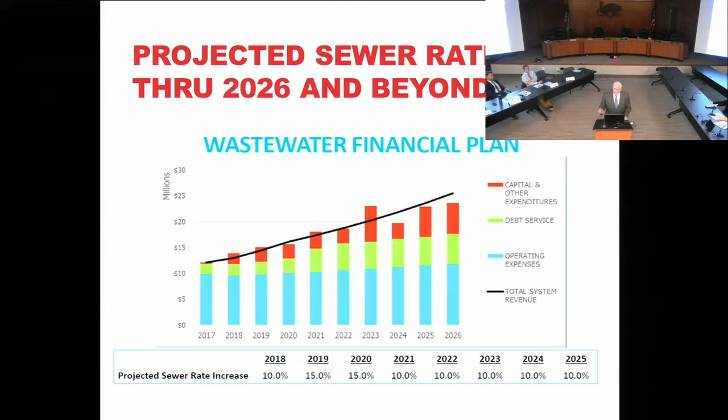I know when I owned a double on Cook, I did not pass on the water. It was baked into the rent. So one of the things that's important for you to know is that rate cost is going to increase in the near future. Our rates, however, are generally competitive.

We're still in the bottom, really 40%, in the region. Rocky River is at $69 based on a typical 6 CCF per month. Lakewood's at 81. The Northeast Ohio Regional Sewer District, which is 37 different communities, is at $89. North Royalton, 95. Parma, 99. They're all facing the same pressures. So while we're raising our rates, we have an eye to regional competitiveness.

I just want to show you a glimpse of a couple of issues here. Underneath the street in front of your rental property is a set of pipes that generally look like this. Sometimes there's only one pipe, but if there are two, it's an over-under sewage strategy.

Generally, because in 1910, when they had to dig these trenches, you know the hard shale that we are bedded on, digging those trenches was very hard. So they dug one trench and put the sanitary pipe at the bottom and the storm pipe on top, and created some overflow invert plates so they could take shifting volumes of rain without flooding basements. So likely, this is the root of the problem.

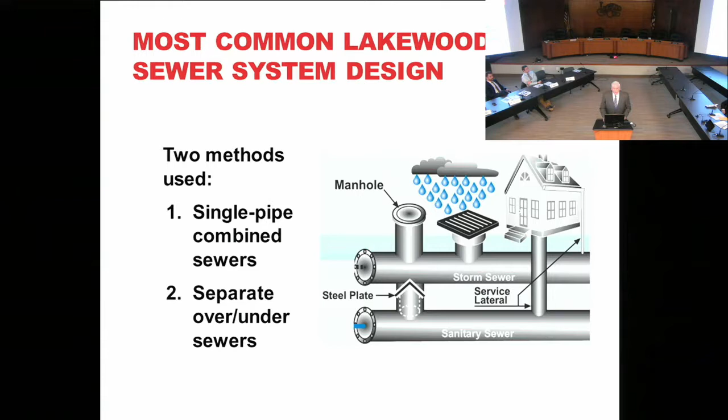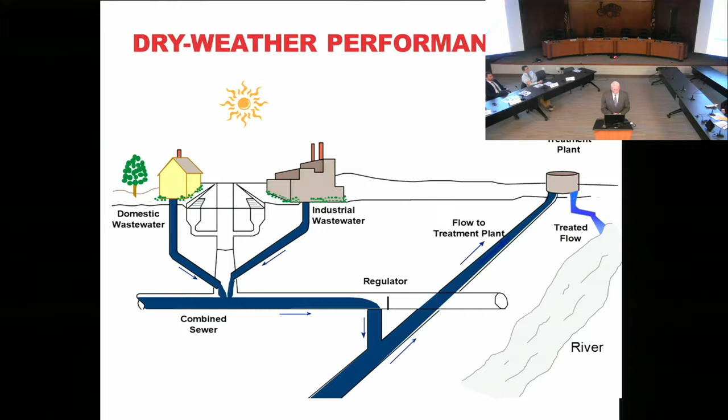The challenge is when we get a big rainstorm. We produce more volume than we can handle. The system starts to fill up, and it's designed to overflow into the lake untreated at that point. If it didn't do that, given the structure, every basement in Lakewood would ultimately be a holding tank.

So the conventional goal in 1910, '20, and '30 was to address waterborne pathogens and public health concerns, cholera, diphtheria, and typhoid.

The goal was to get this dirty water away from the population as fast as they could, and the best way to do that in a city like Lakewood, given that we're on a high plateau with a major watershed we could send it to. In that watershed, Lake Erie, it would become diluted and ineffective. Well, obviously, 100 years later, that dilution wasn't capable enough. We degraded the quality of water, and we needed to make changes. We've been making them ever since.

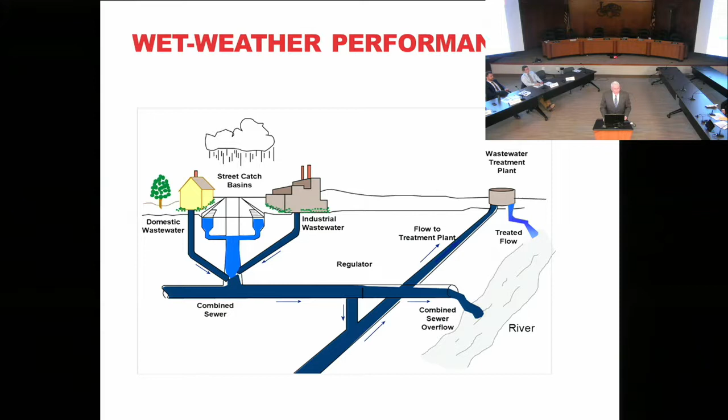So I have a video that's going to show you what happens in a rainstorm in Lakewood. Let me maximize that.

Many older cities across North America use combined sewer systems, where both sewage and stormwater flow into a single pipe to wastewater treatment plants. But during heavy rainfall events, this mixture of raw sewage, stormwater, and garbage backs up the sewer system, creating a combined sewer overflow, or CSO, allowing untreated polluted sewage and garbage to flow directly into local waterways.

All right, so that's what happens in a nutshell. Let me close this off.

Most of us don't spend a lot of time thinking about the infrastructure beneath our feet. When we wash the dishes, empty the bathtub, or flush our toilets, a lot happens underground, out of sight and out of mind. So what does happen underground? Well, Winnipeg has a... there we go. All right, I think we're back.

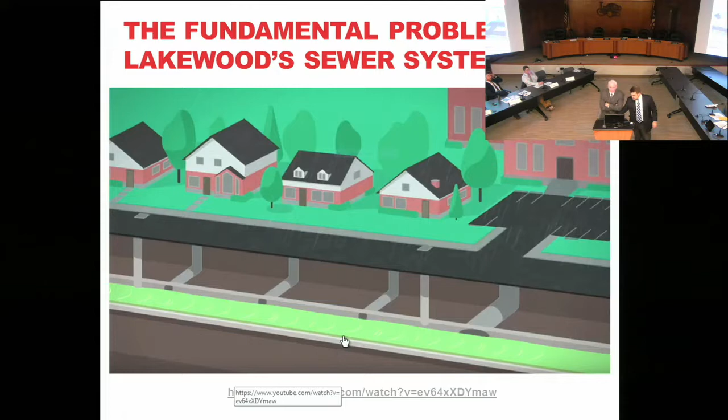So you get the idea that in dry weather, we have 10 times the capacity to deal with our everyday volume. In a wet weather event, a big one, we don't. For example, this past October, we received 0.8 inches of rain in 20 minutes. Perhaps you remember that storm. It was an enormous volume that came at us very suddenly, and our system behaves as designed to direct that untreated water over dams built into our sewer system to overflow into the lake. That's illegal by the Clean Water Act of 1972, and we are earnestly working in a variety of ways to re-engineer the system so that we reduce those overflows and ultimately eliminate them.

One key element that's important to you is how water moves off your house as a private property owner. This applies to rental property owners and non-rental property owners alike. The roof is the collector system. You'll see in this picture an example of a house on Atkins, where the blue are the gutter pipes, and there's a lateral that runs out to the street.

Down below, you'll see green, which is the sanitary pipe. In Lakewood, generally, the sanitary pipe is at the foundation level below, and oftentimes the stormwater pipe is several feet above that, and that's a pretty classic example.

How we manage water that moves off your property becomes a challenge. Now, this is a busy picture, but it shows the variety of things that go wrong. Things get clogged, pipes actually infiltrate from one to the other. In 1918, when my house was built, the lateral pipes were clay pipes, and they basically just butted against each other.

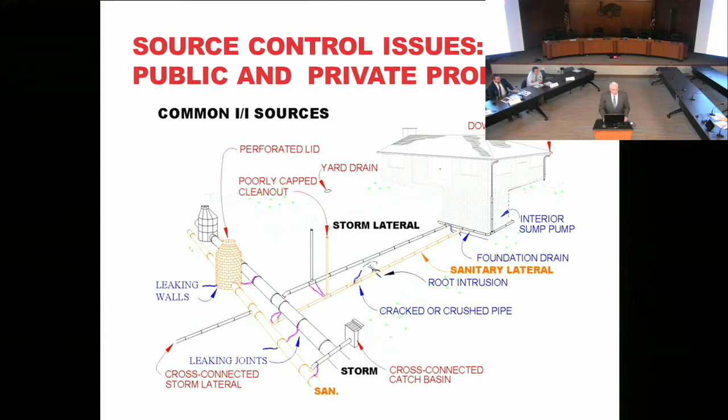When they create the backup, you get this infiltration of storm to sanitary, sanitary to storm. Sometimes the contractor who built your house or mine, when they got to the street in an unregulated housing market, didn't care which pipe they hooked into. They hooked to the first pipe they came to, and the sanitary pipe might have gone into the storm pipe illegally, or vice versa. Either way, we create significant pressure on the volumes. So there's a lot to think about here. I want you to be aware how serious it is, and I want you to take responsibility for understanding how water moves off your property.

Now, in the last 10 years we've spent about $18 million on water distribution improvements — those are water mains. Our water mains are also of the same vintage. You'll see this, particularly in cold weather like we have these days: the ground shifts, the pipes are brittle, and you'll create a fissure in a water main under high pressure, causing leaks in the street that require us to patch and ultimately replace.

We've been pretty systematically replacing water mains. It's probably the most disruptive project we can put on your street. We have to dig it up twice — first to put in the new pipe and test it, then dig it up again to hook all the laterals from the houses to it. It's a very, very challenging process. If it happens to be your street's turn, once in a century, bear with us on that, but it's important.

We've also spent about $30 million over the last 10 years on our sewer pipes. But here's what's ahead of us: we estimate we have about $57 million worth of work to upgrade all our water mains over the next several decades, and ultimately probably $321 million of sewer work ahead of us. That's if we're really diligent about it — we're working hard to reduce these numbers. But the fact is, in a second-century view of the world, with our obligations to protect our watershed, and with a sewer system designed to behave in a different, acceptable environment, we have a lot of work ahead of us.

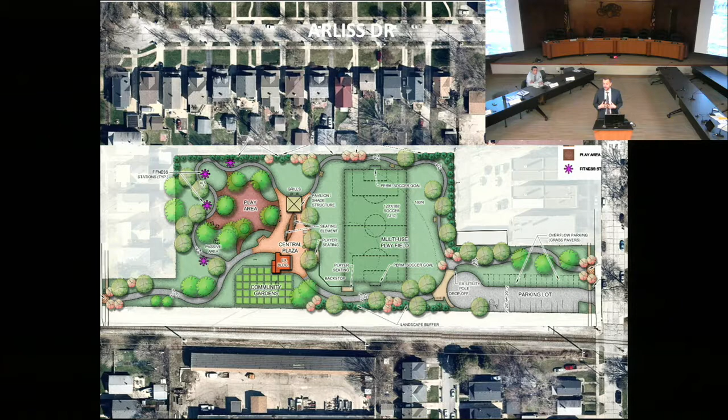What we've heard from our community members is that our park space is near and dear to our neighborhoods, and that investments into our parks—just like the improvements at Lakewood Park and the Solstice Steps, at Kauffman Park downtown, and at Madison Park—are showing a ton of value to our citizens. Improvements like this are important because we know they show value to our community.

The second park project we have our eyes on is Wagar Park. At the same time we did our master plan for Cove Park, we also did one for Wagar. Wagar is a marquee park on the west end of Madison Avenue, and similarly has not really seen a focused improvement plan ever in this community.

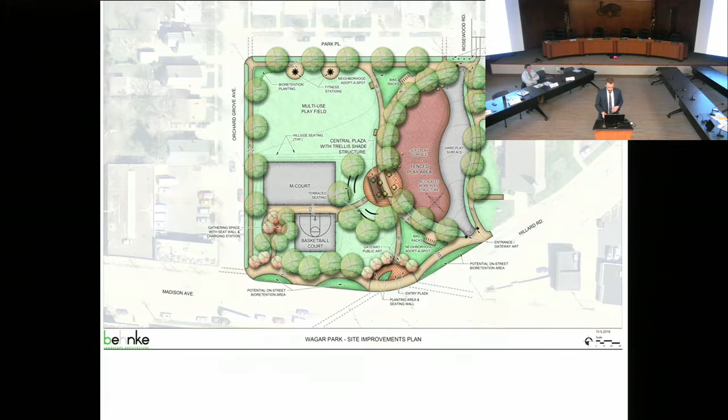We spent about a year coming up with this master plan. You'll see improvements including a new basketball court, a multi-use court, and a newer area for a multi-use field. This one also has a brand new playground concept incorporated into it.

This project is a little bit further out than the Cove Park project. We're looking at 2019 as a potential start date, but we wanted to show the community that we were serious about our renovation here. So last summer, we did a public art project where we painted a custom mural on the street for neighbors to enjoy, and it's been a wild success for us up at Wagar Park.

Next, I wanted to get into some commercial development projects happening throughout the community. The first is a project you're probably all familiar with: the Cleveland Clinic Family Health Center at the corner of Belle and Detroit, currently under construction and on schedule.

This $32 million investment will be open on July 25th of this year. They've been under construction for about a year, and it'll be certainly a welcome addition to our commercial corridor. Here's a photo from last fall—if you've been by the site, they've put the entire skin on the building, and they're actually putting up drywall right now, so they're progressing very nicely on site.

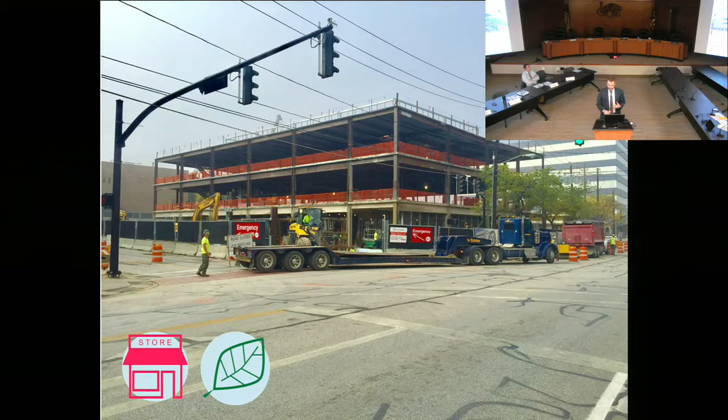We spent about a year with this property owner to re-envision this building's future. If you drive by, the outside is certainly going through a major exterior renovation, but more importantly is what's happening on the inside. This was a property predominantly built as office space that became non-competitive in the marketplace. The interior space just wasn't competing, so we worked with the property owner to re-envision its future. The exterior renovation is really a representation of how you do adaptive reuse.

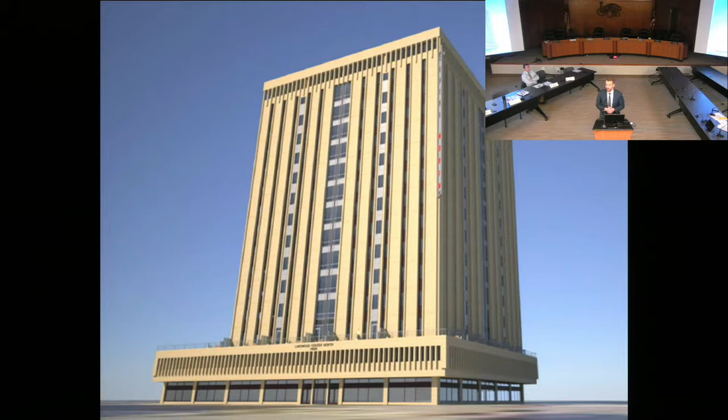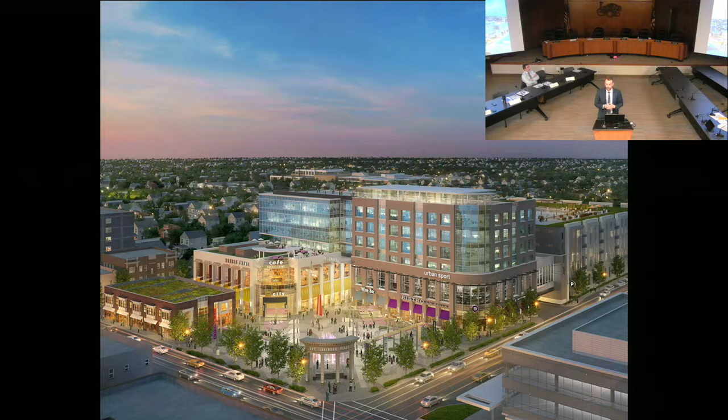Next is a project on the same block. So we had the Family Health Center, and I talked to you a little bit about Lakewood Center North. Then on the south side of Detroit at Belle is the former Lakewood Hospital site, where the city spent about a year interviewing developers to land on the best and most qualified developer to take on this site, which is Carnegie Management and Development Corporation.

They envision a mixed-use project on this site that includes new office, new retail, new residential, and two components that we're really excited about. At the corner of Belle and Detroit will be a public plaza for the community to access. This also envisions the historic renovation of the Curtis Block, the 1920s building at the corner of Marlowe and Detroit, which will get a complete renovation as well.

This project is currently going through the term sheet process with the developer, and construction would likely start on this project at some point in 2019.

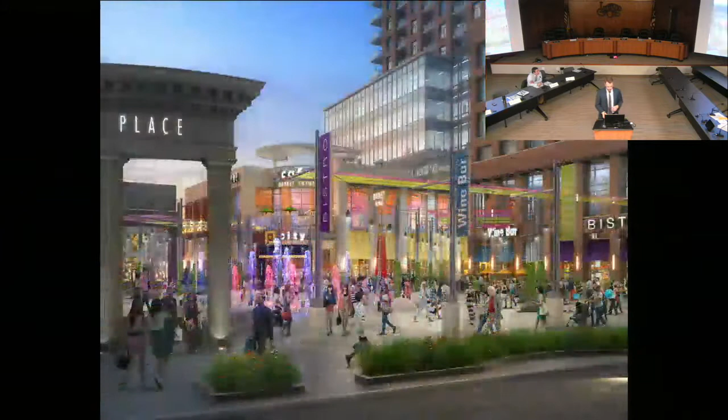Here's a closer look at what is envisioned for that public space at the corner of Belle and Detroit.

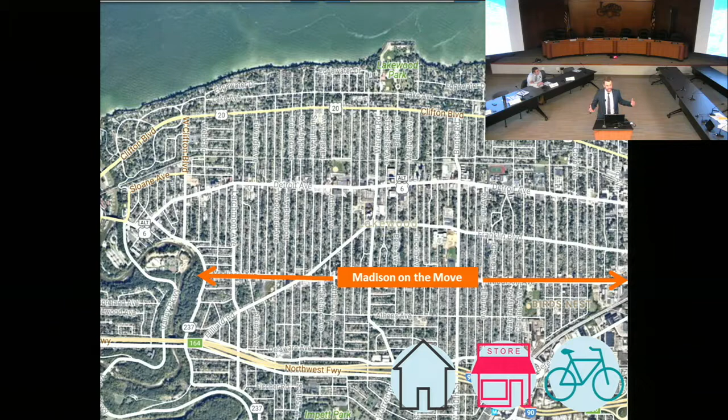In addition to some projects happening in our downtown core, right at Belle and Detroit, we're seeing a lot of commercial activity on Madison Avenue. In fact, since 2013 we've seen a great uptick in commercial building permits. Over 300 commercial building permits have been pulled for commercial buildings in the district. Those are not HVAC, electrical, plumbing permits - this is structural work happening in our 100-year-old building stock on Madison, which is really important, not only for our buildings, but for our neighborhoods.

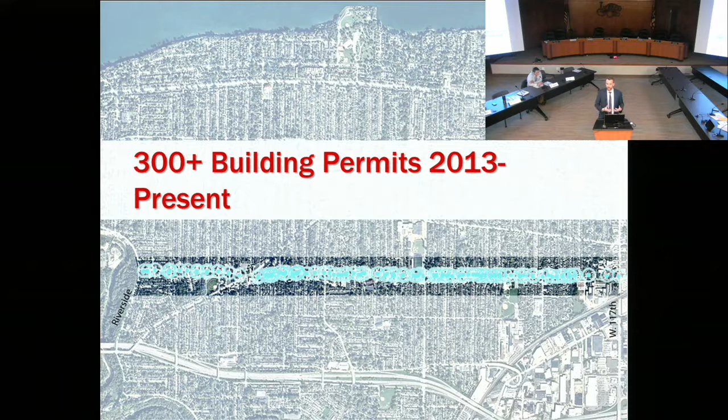So we're continuing to see Madison perform well in the market. This is one building that has gone through extensive renovation.

Similar to Lakewood Center North, this was also sort of a brutal building to look at every day as we went down Madison Avenue. The mayor and I were laughing earlier today - this building probably could have been two uses: one was a storage building, which is what it was built for, and two, a distillery. Those were our only two options. We didn't have anything else to do here.

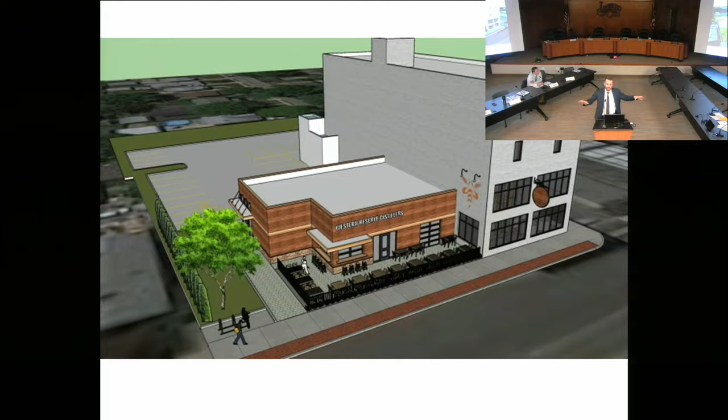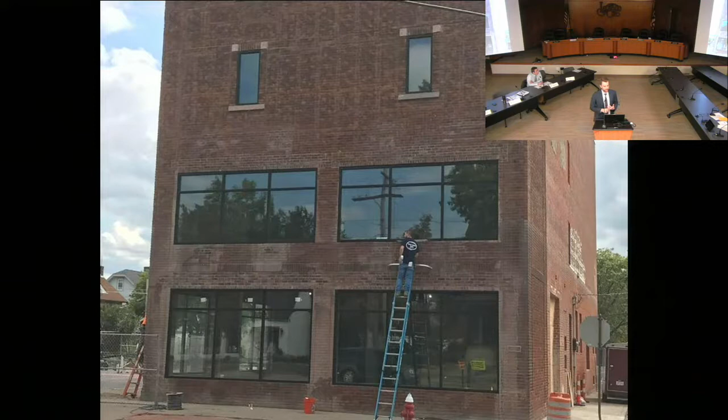So we walked apartment owners, condo owners, and people that wanted to do office space through here. It was a really hard space to repurpose, and we needed Kevin and Ann Thomas to show up and have a creative idea to repurpose it. If you've driven by, they have started extensive renovations on the building and are actually adding an addition to do a full-scale distillery at this location. They'll have a full-service restaurant inside too, and I expect them to be open later this summer.

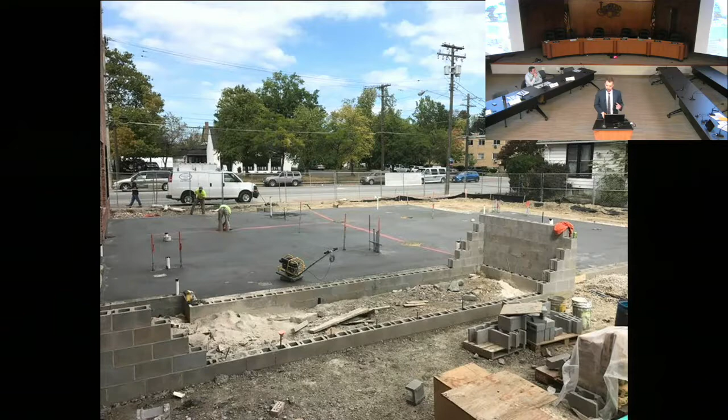And this is a photo of the addition that's on the east side of the property.

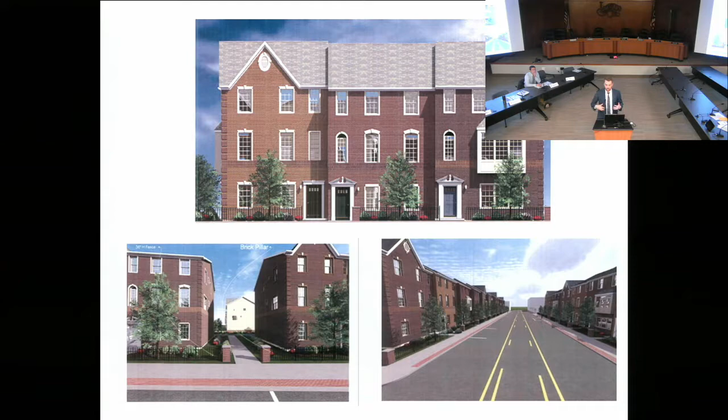The price point on these averaged about $250,000, and they sold out quicker than expected - every unit is sold out on site. If you drive by, they are finishing up some of the units, and I expect them to be done by the end of this year.

On the city's west end is a similar project. The former McKinley School property has been under construction for the last two years by Liberty Development Corporation. They are under construction right now on 40 townhomes at this site, and they are also nearly sold out of all the units on site.

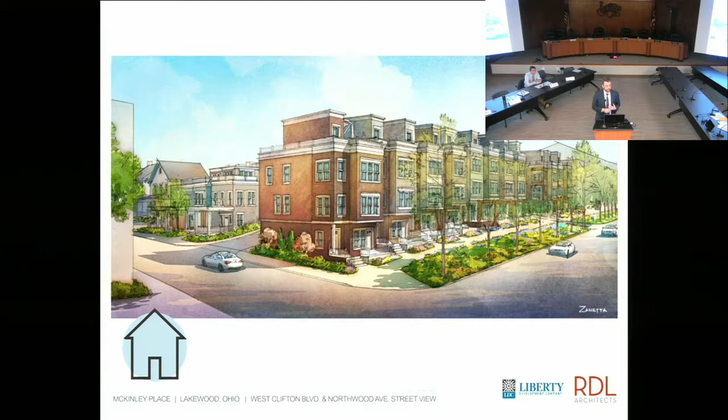The most interesting part about this project was that we explored the option of introducing first floor master suites on this site, so 10 of the units actually have first floor masters. When we talk to citizens in our community, that's one of the greatest needs they talk about, how you develop in an urban community to introduce first floor master suites. We wanted to try to figure it out with new construction, and we were able to be successful on this project.

Last but certainly not least is the importance of our housing stock, and that really ties back to everybody in this room tonight. We value very much the quality of our housing stock, and it's your investment in these properties and your goodwill in making them the best that you can that really define the success of our neighborhoods. When I talk about economic development, I reference our housing stock all the time, because in each of those houses there's somebody going to work every day, and there's a landlord in a lot of cases making investment in that property that makes a big difference in our communities.

So I wanted to end with thanking you for being here tonight and being responsible landlords in our community. Kevin, that's all I got. I will stick around for sure after if anybody has any questions.

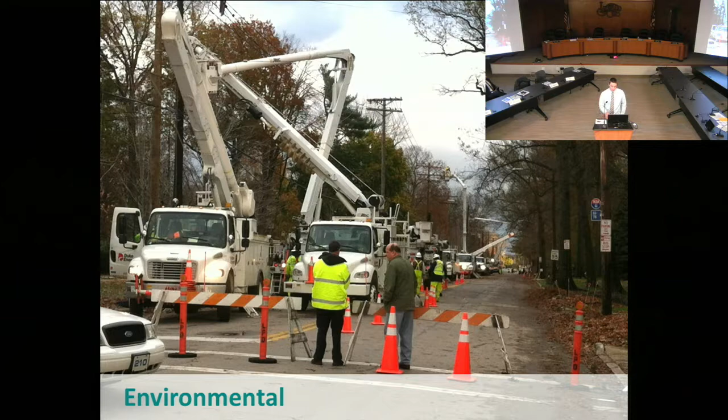In addressing shocks and stressors that come towards our community, what sorts of shocks and stressors does a community face? Certainly environmental shocks—this is a photo from the morning after Hurricane Sandy, which knocked out power and knocked down trees across a lot of Lakewood. With a 100-year-old electric grid, a 100-year-old telephone grid, a 100-year-old water system, an event like this is very stressful and takes a long time to recover. So as we rebuild these systems, as we reinvest in them, how do we do that correctly? Those are among the things we're going to ask our city administration and the task force, which I'll introduce in a few moments, to think about.

We also respond to political and social stresses. A lot of what we respond to in City Hall comes from Washington or from Columbus. When funding goes down, when policies change, we have to adapt to that, regardless of our change in values. So being more self-reliant, planning in a way that gives us greater flexibility, is very important. Responding to changing demographics is also very important.

When you look at the ages of people within the city, how they're changing, who's moving in, who's moving out—do you have to invest in schools, in senior services, in young families? Getting ahead of those curves and knowing what you're about to face is very important.

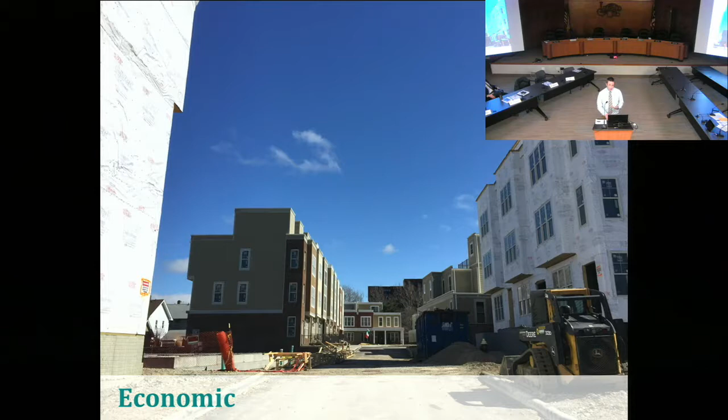Economic shocks and stresses don't all have to be negative to be a shock or a stress. Certainly the incredible growth in the housing market over the past couple of years has been as stressful to many of us in this room as the crash in 2008 and 2009 were. Many things are changing in the economy and the policy of our city, and how do we leverage those things for the benefit of all our citizens.

So we think that if we're good at this, we'll do three things. We'll profoundly influence the quality of life of our citizens. We'll allow Lakewood to endure, adapt, and thrive no matter what sorts of shocks and stressors we face. And we can positively impact the most vulnerable in our community.

I think my favorite example of this is hearkening back to that Hurricane Sandy example, or just any power outage. So if we all experience a power outage, for some of us that means a night without the TV on. For some folks, their freezer is going to melt, and those groceries would bust their budget for the month. For someone on in-home oxygen, that's a full medical emergency. So it's a stress to everyone, but fixing that electrical grid or investing in those systems benefits everyone, but benefits the most vulnerable the most.

So Bryce talked about our community vision focus areas. When we were updating the community vision in 2017 on its 5-year anniversary, we were benchmarking that plan against some of the best city plans, master plans in the nation. And one of the tools we used for benchmarking was a tool called Eco Districts that came out of the West Coast. What Eco Districts does is take 25 categories and measures the cities that measure themselves with Eco Districts against those categories.

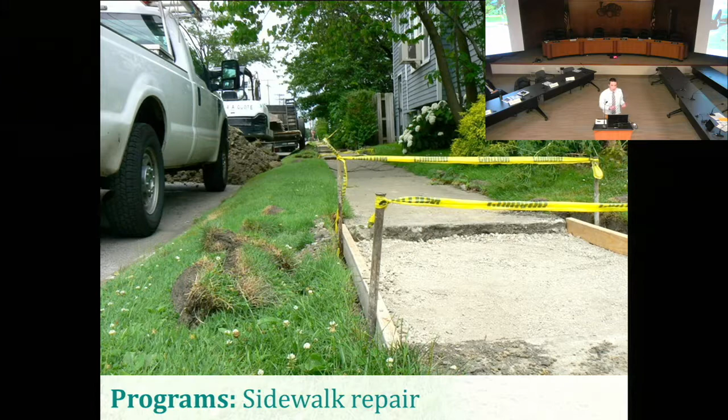How do we do this? A program we already do is our sidewalk rehab program. Many of you have probably gotten a sidewalk assessment from us - that was probably not a very good day. We recognize that, but we've also repaired over the past 5 years 180 miles of sidewalk. That's enough sidewalk to walk from here past the Pennsylvania border, and that keeps our neighborhoods safe and walkable for everyone. I like to talk about 8 to 80 cities - from a tricycle to a walker. If it's good for someone 5 or 6 years old on a tricycle and someone who's 80 going to the corner store behind their walker, we've done our job. That's a good sidewalk. So that's something already going on advancing that mobility goal.

Expanding the dedicated bike network - lots of trips in Lakewood are short trips. If those can be made on foot or on bike, that takes cars off the road and keeps capacity for those commuting trips, for those longer trips where they really belong in a car.

Something we're not doing but could be doing in the future: things like electric car sharing. In the future, not everyone who drives may own a car. Mobility as a service is a buzzword - I could expound on that for 15 minutes but I'll spare you. Something you may see in the future.

And something you may see way in the future: self-driving community circulators. This technology is just coming online. We hear all the time from residents that they miss the community circulator, and from RTA that they can't afford to put it back. If there was no driver in that driver's seat, it would certainly be easier to do. So maybe in 10 years, something like this is coming down the pike. When we talk about big ideas, this isn't coming next year - it's not in the budget for next year, but we're asking people to think about this and anticipate that these sorts of things may be possible in the future.

So when we talk about how to measure this: the number of miles traveled in a single occupancy gas-powered vehicle - we want that number to go down every year. That's a number the census already tracks, so we can measure our progress against that and against other peer cities.

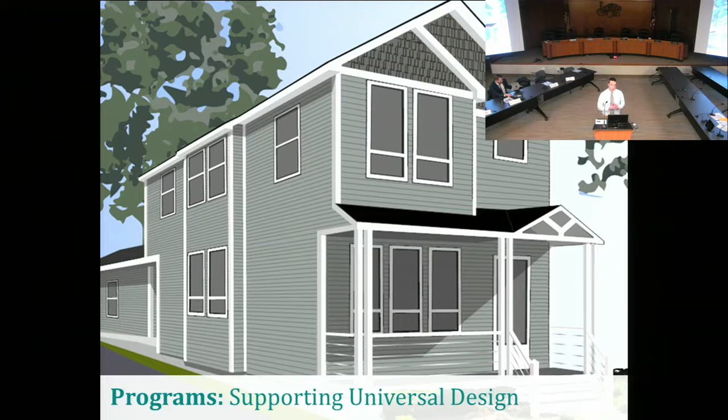So a program to support universal design, accessible housing, first floor living. If we had, say, a rebate program that helped build houses with first floor masters, or other incentives for accessible housing, we may be able to reduce those wellness checks. A check-in service rather than physical checks by police or fire would also go a long way to advance those goals.

A program to keep our seniors engaged and active with the community - we have this volunteer framework with the Help to Others program that runs through the high school, and with the city's support, this framework could be expanded to retirees and seniors to help keep them active and engaged in the community, reducing the need for those wellness checks. So all those sorts of things could help preserve our response time by addressing non-emergency responses.

Overall, there are a lot of folks who have a role here. For you as citizens and for landlords, it's to be engaged and provide input to this task force and to City Council as these things move through city dockets. Overall, we're looking at our community vision goals and how they can all be tied together under this umbrella of resiliency. So I thank you for the opportunity to bring that big idea forward. Again, this is all something we're doing to advance our standing as a city and to protect your investment, and make this a great place to live for your tenants and for yourself as citizens. So I thank you again.